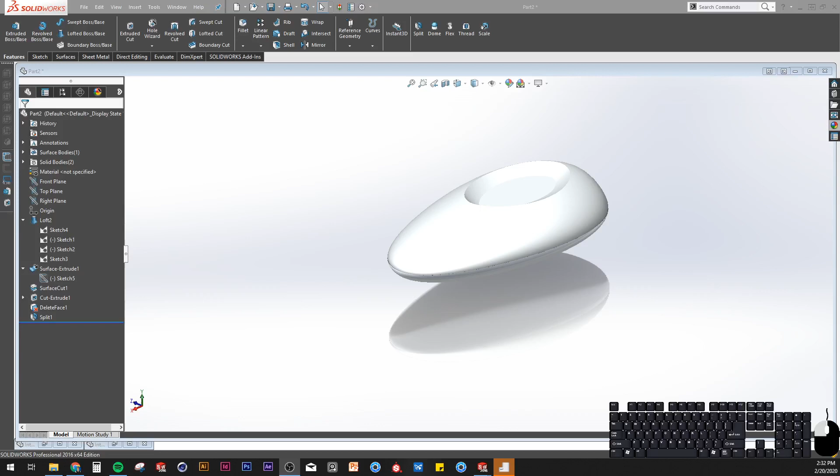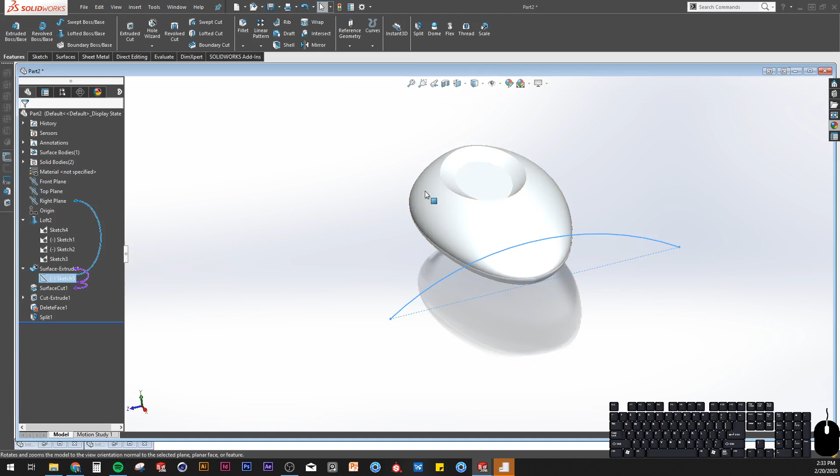Alright guys, welcome to another Solidworks tutorial. Today we'll be going over lofting really organic shapes, similar to soft rounded surfaces. We won't need to use any surfacing except for maybe some little extra details like I have here. Let's go ahead and get started.

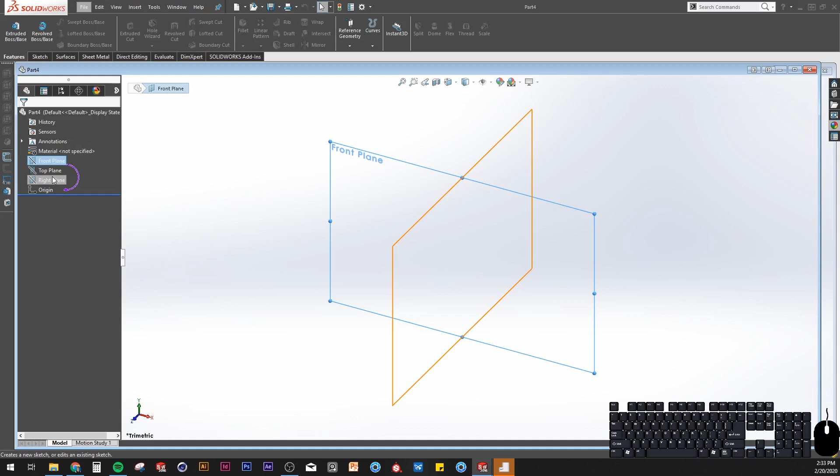The first thing we need to do is set up our sketches, just like any other model. Let's go with our right plane first.

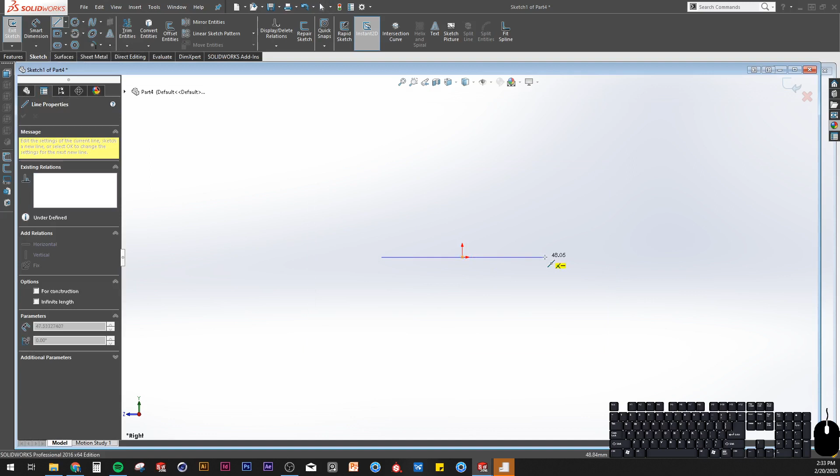What we need to do is create our midpoint line, and I might try something different. I'm going to go to my midpoint line tool by clicking the little arrow next to the line here, clicking on our origin, and let's go out to 50 millimeters. Which is kind of small, we might bump that up a little bit. 100 is perfect.

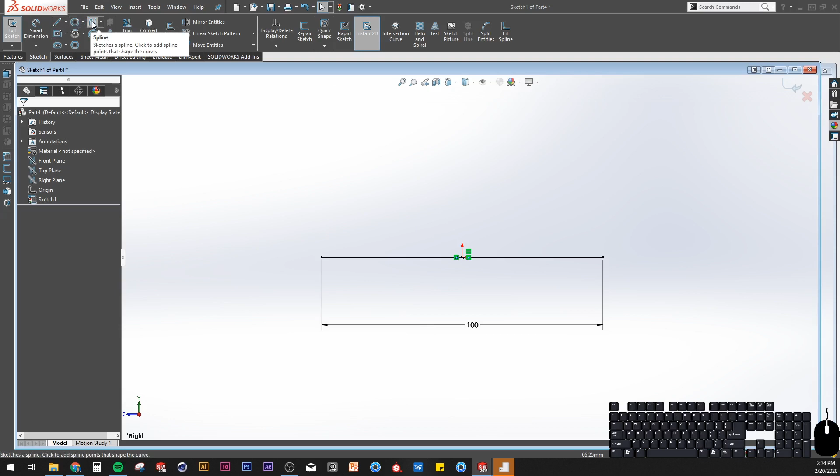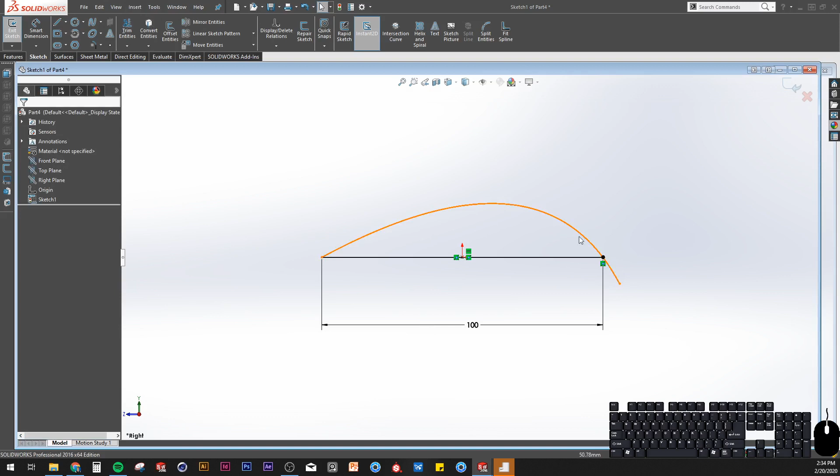Next thing we need to do is create a spline. To do this, we need to go from one point to the other, and then we can do one more point here, but we'll trim that off. Then we need to drag our handles and give them a vertical relation on both sides. But what I might do is create one a little bit higher than the other.

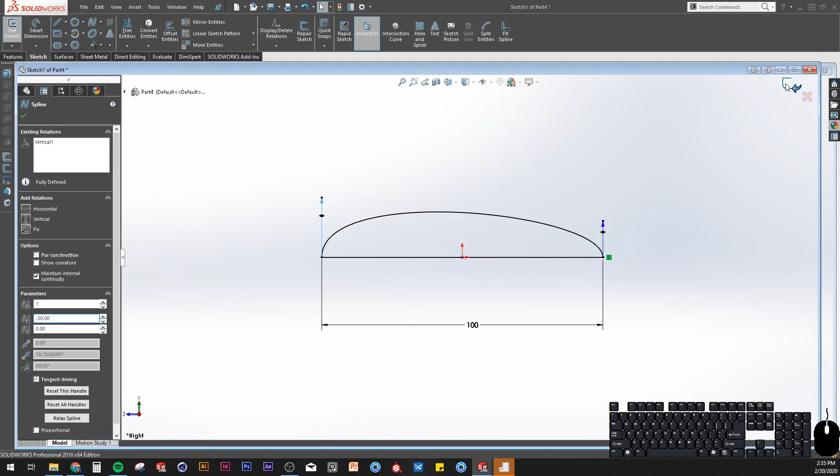Now let's create another sketch on the right plane, but for the bottom. I'm going to start off with my spline this time, going from one end to the other, and then you can click on the line to reveal your handles. Once again, give these a vertical relation, and we'll drag them up. All right, and then we need our midpoint line here.

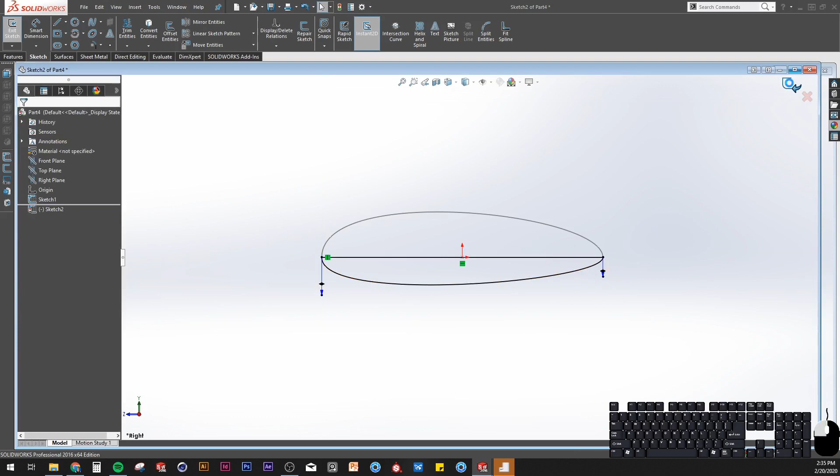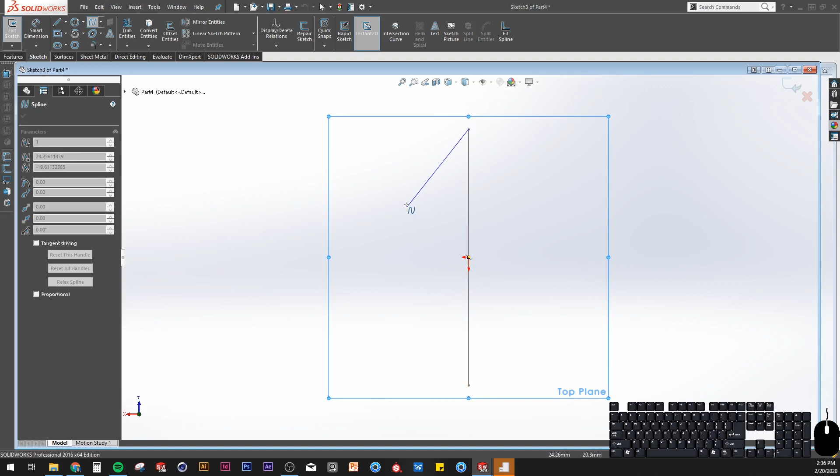Lastly, we need to create a top plane sketch, and we'll be doing this twice. First time let's create, just like before, a spline. But this time we can do a 3-point spline. So let's start with our end, and maybe we'll go somewhere like here and then down. Then we're going to make our top and bottom handle horizontal. And then let's drag this arrow over like this.

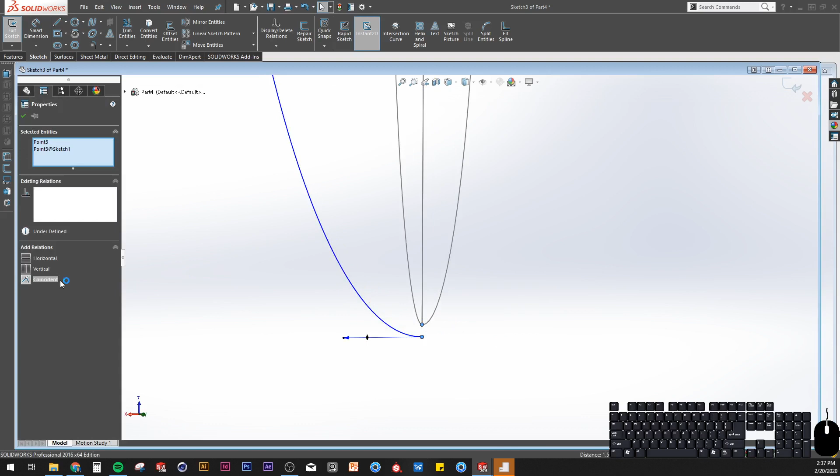Okay, that works. But you can see these endpoints are kind of just floating, so we need to make sure that those snap to where they need to be, or add a relation manually. All right, and then let's use our line tool and hit OK.

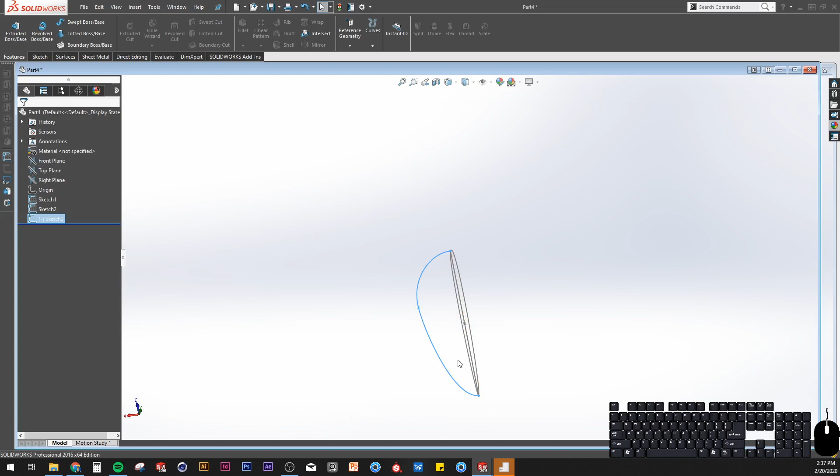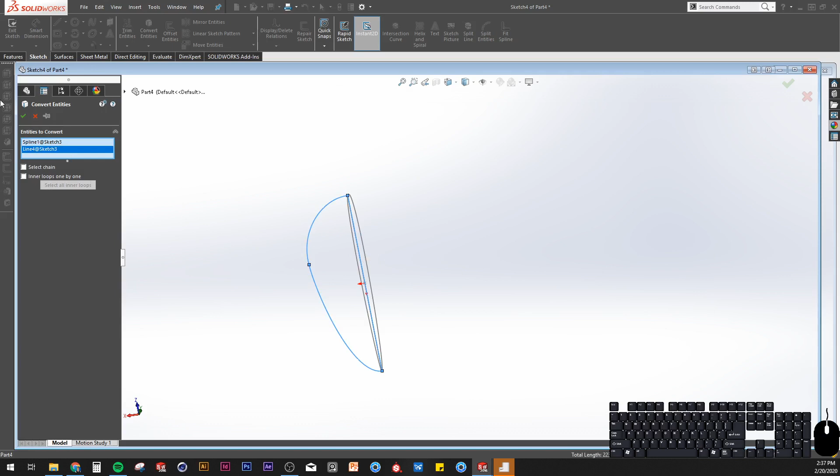Now we need to mirror this, but what I'm going to do for that is create another top plane sketch. Let's copy or convert entity. All right, and then we're going to mirror this entity about the center line, and we're going to copy this. But now we are going to need to make the spline that we copied into a construction line.

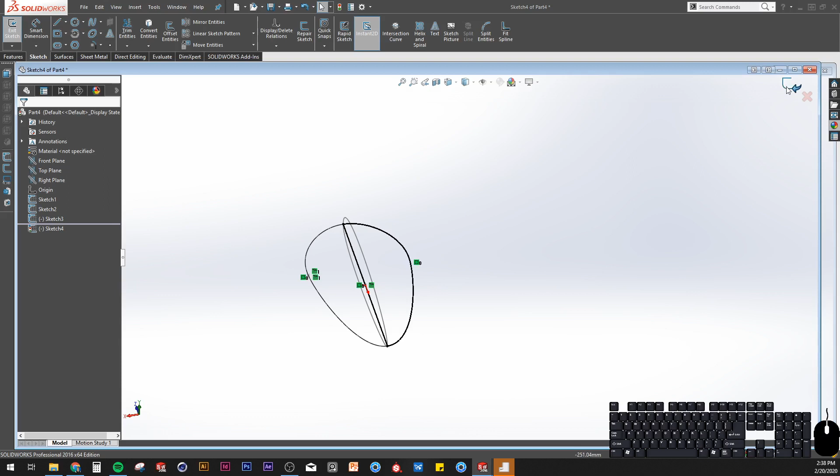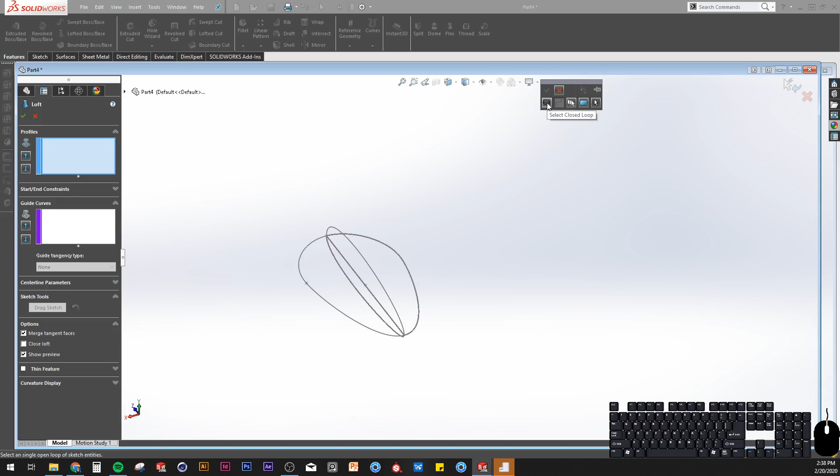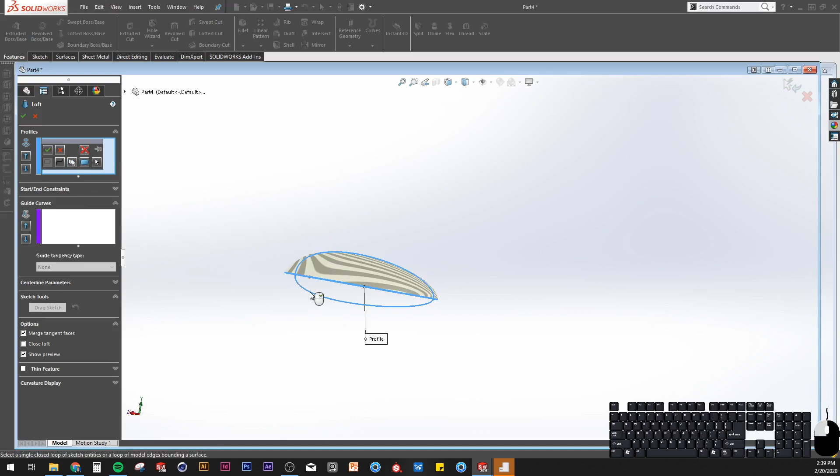So now that we have our form pretty much roughed out, let's go into our Lofted Boss/Base tool. What we want to do is right click into our profiles, go to Selection Manager, and we're going to use our closed loop selection tool. We're going to select all of our sketches, starting either clockwise or counterclockwise, like this. You'll see that it hasn't finished going all the way around, because if I just click on this profile again, it's just going to deselect it. So we need to go and click on our Close Loft option.

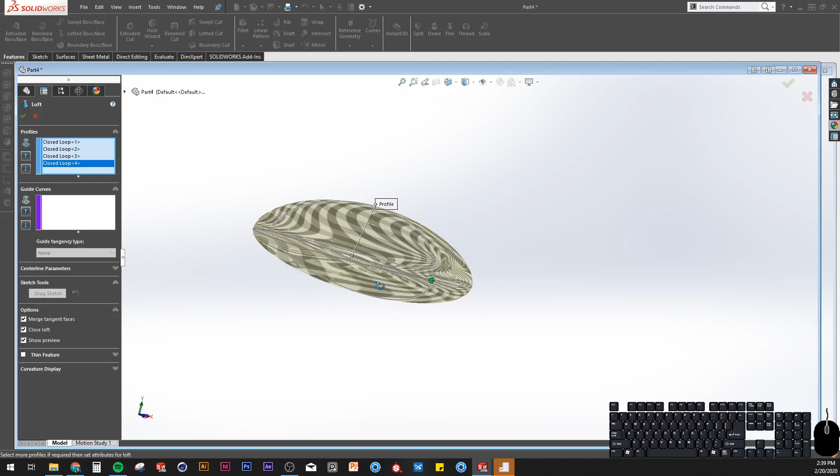Okay, and then hit OK.

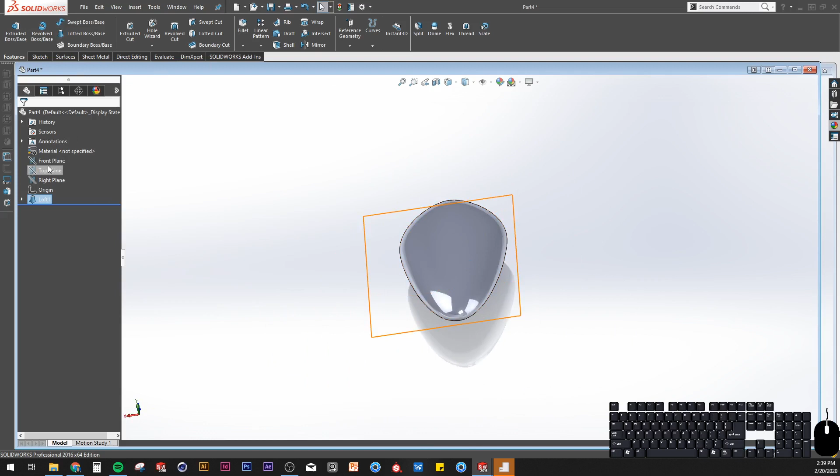So this is a nice way to create a very organic surface shape just by using the Loft tool and sketches. Now let's have a little bit more fun with it and add in a little thumb groove. Maybe this is like a little presenter remote for a PowerPoint presentation, or maybe this is just a worry stone fidget toy.

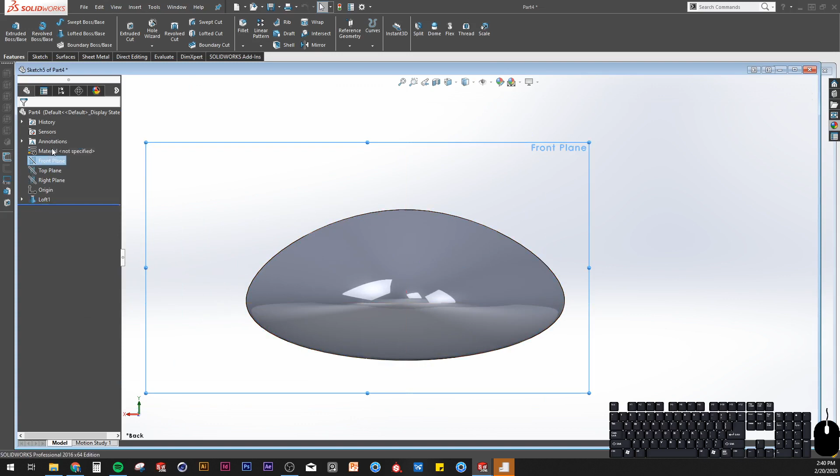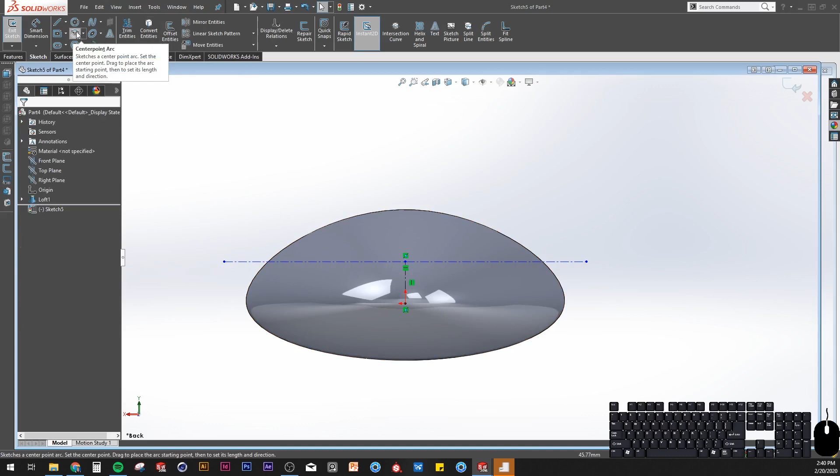Let's create a new sketch on our front plane. I'm going to create a center line coincident to the midpoint of the horizontal line, and then create an arc. Let's do a 3-point arc, something like that.

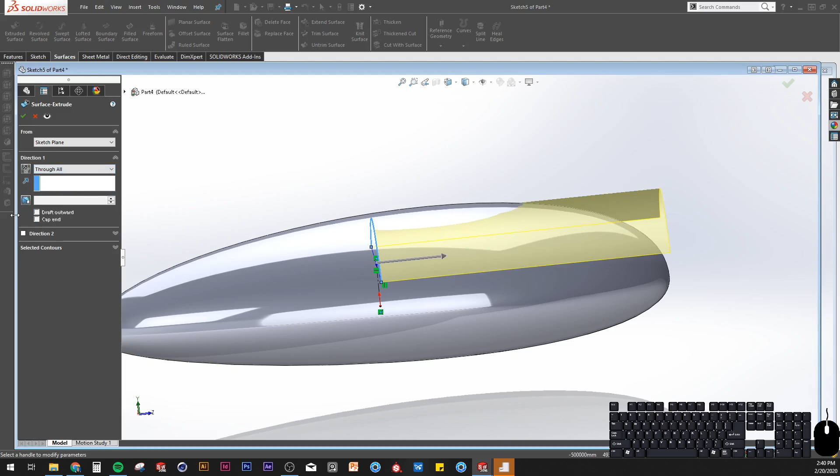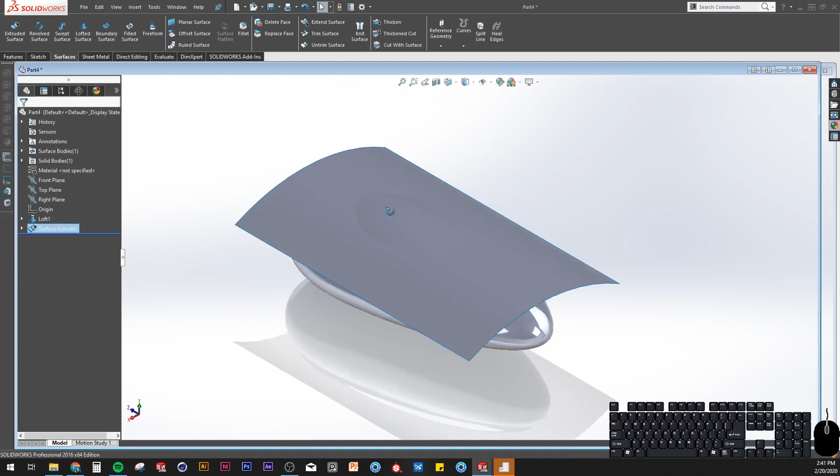And let's do a surface extrude. I'm going to do through all, and through all on the other side. There are multiple ways I could do this. I don't have to use a surface, I could just simply use a cut, but I want to show you this tool, because we can cut with the surface, which really gives you a lot more freedom.

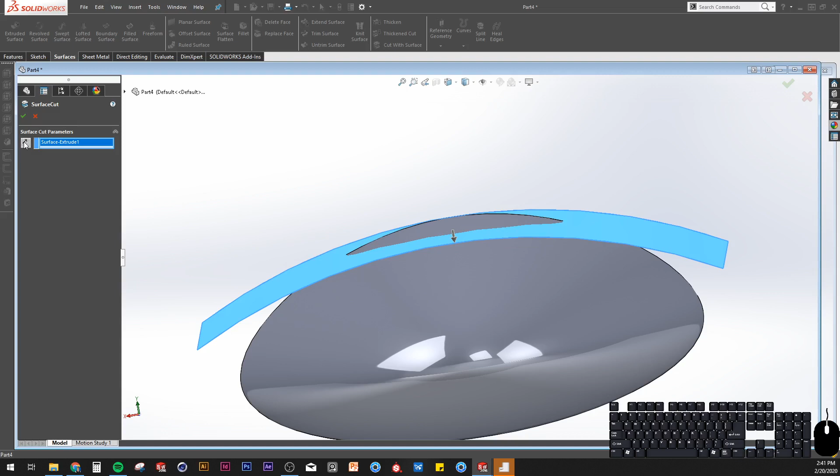Under our surfacing tool, using the surface cut, let's select our new surface that we created, and make sure that this arrow is pointing in the direction of the cut that you want to make. I have to flip mine. And I can go ahead and hide the surface.

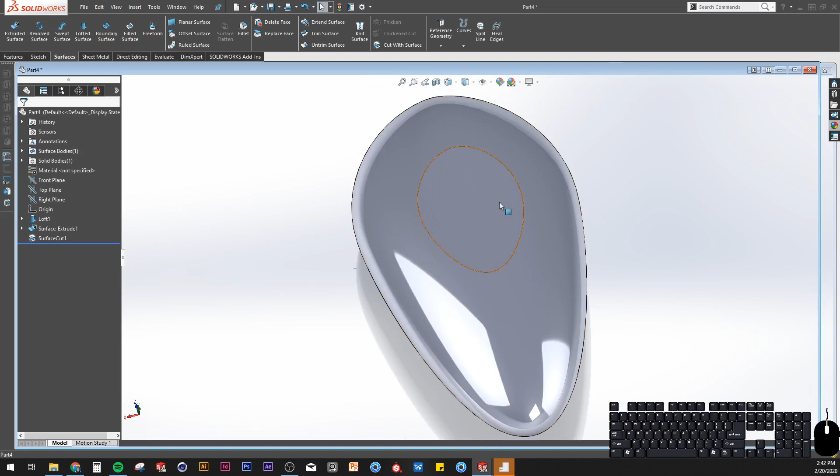So that's kind of nice. But now I want to make this so instead of just having it arced, maybe I want it to dip in a little bit. So let's go and create a sketch on our top plane, and then I'm going to offset. While you have this face selected, choose the Offset Entities tool, and let's go down by about 4 millimeters.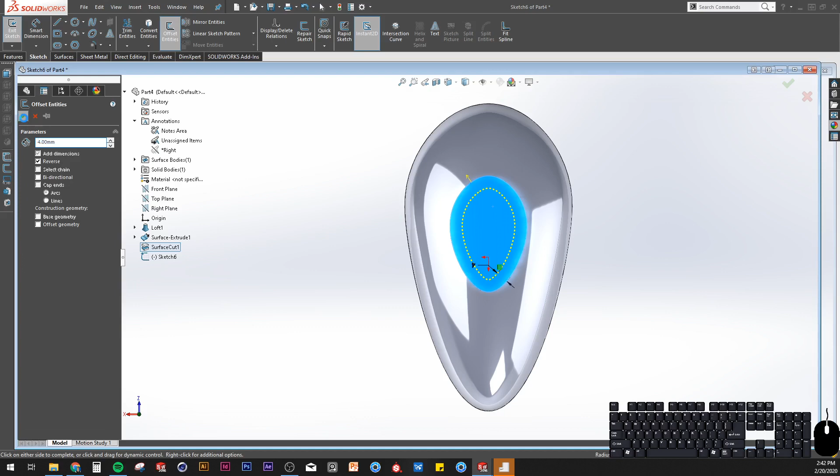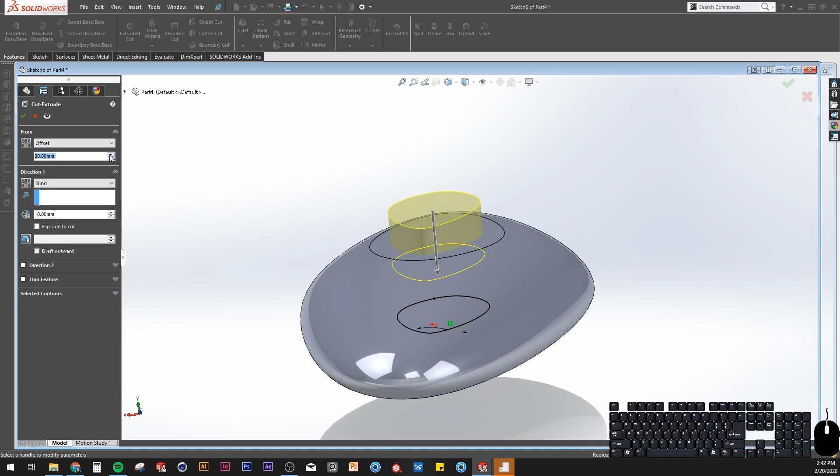What I want to do is extrude cut, but I need to offset this. So from under the from area, let's move that up a little bit. 20 is too much, 30 is too little, so let's go 25 or so, let's go 22 maybe. Something like this.

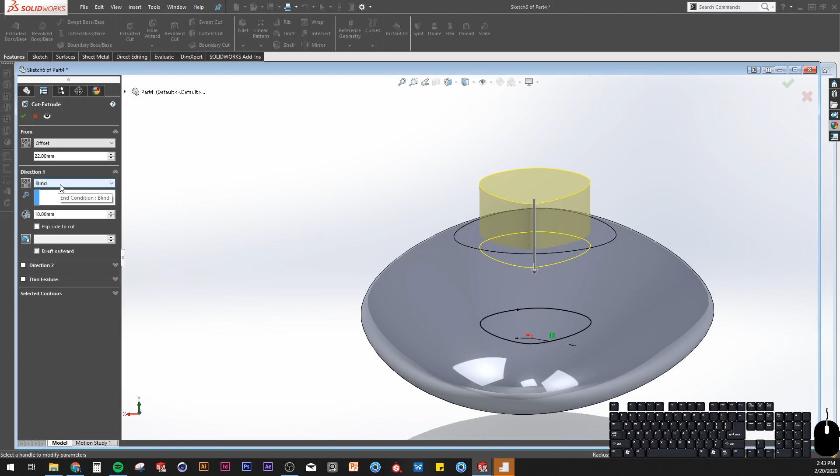Oh, I see what's happening. Let's go back down to 10, 15, no, 12. Okay, there we go, 12. And then under the direction, make sure that it's going upwards, and just choose through all. Hit OK.

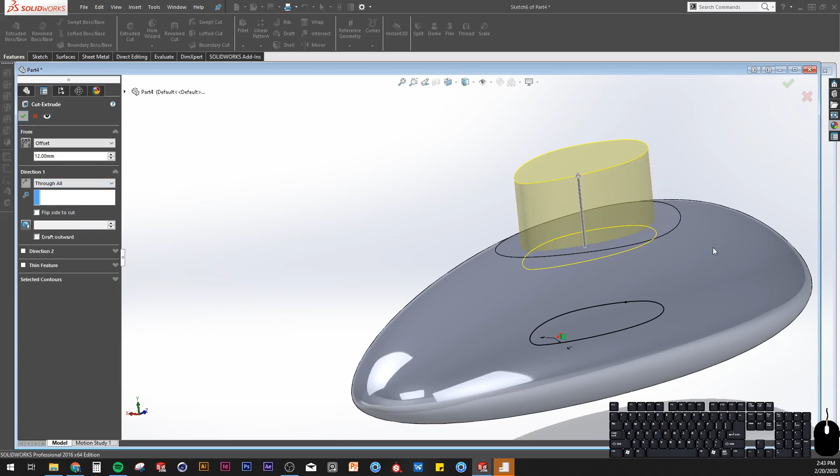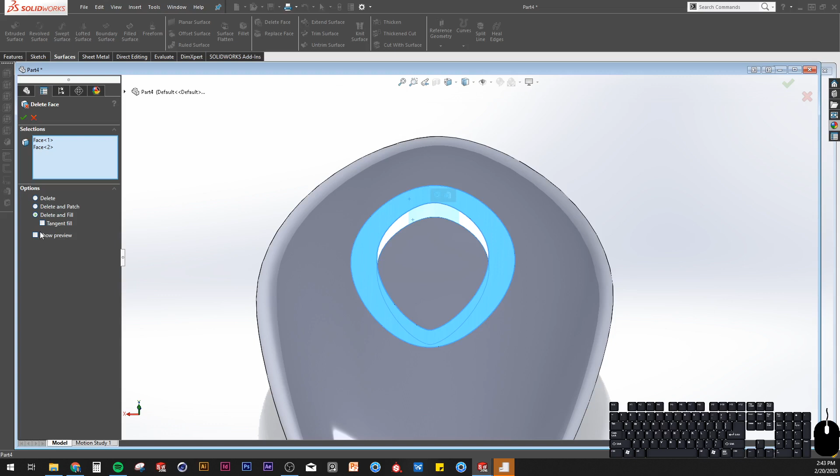Now what we need to do is delete—going back into our surfaces tab, choose delete face, select these two surfaces here, and then we want to use the option delete and fill, but let's uncheck the tangent fill option. You can see a preview, well, maybe not because it's hidden under the surface, but sometimes you can see the preview. And hit OK.

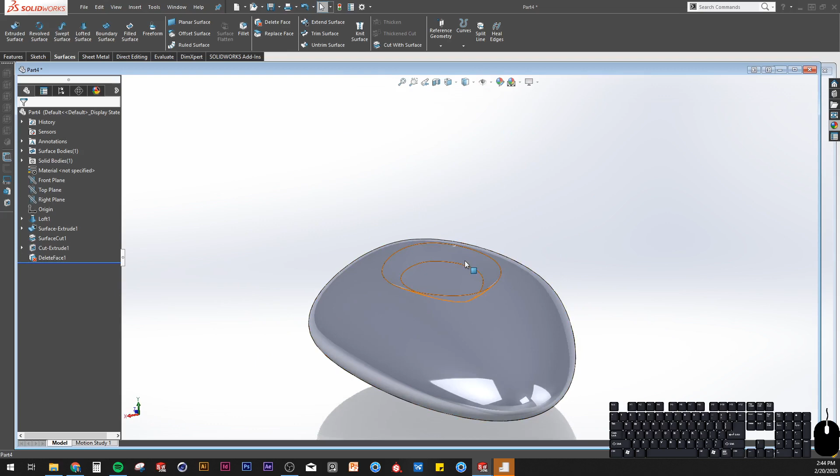And what this gives me is a really nice even chamfer. Because if I just use the chamfer tool, it wouldn't be perfectly symmetrical on the top face because of the fact that it's on a curve.

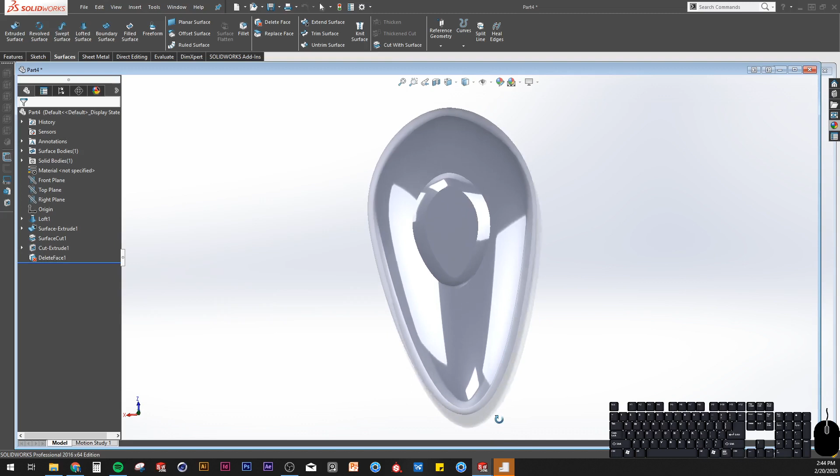All right, so there you have it. Really cool little organic shape, and we could even do that same thing we did here on the front face.

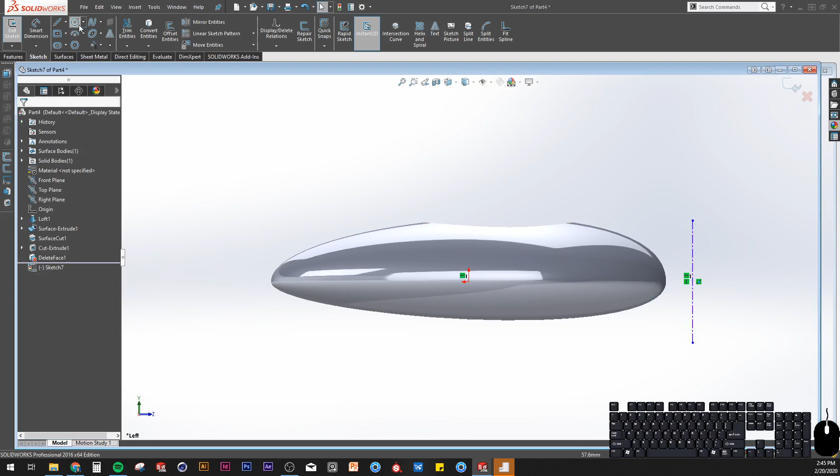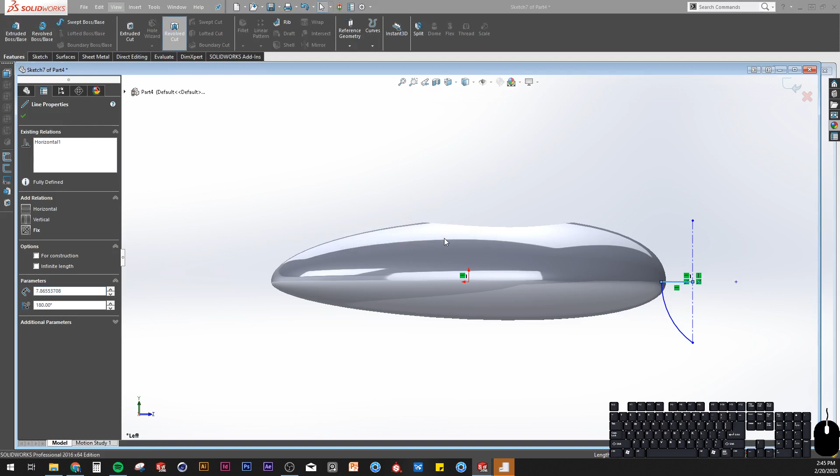Actually, let's just do that real quick. Center point, let's go horizontal, so my midpoint is horizontal to my origin. Use our arc tool. And actually, what I can do here, let's go ahead and trim this off. I'm going to do a Revolve Cut. I didn't have this closed, so it asked me if I would like to close this sketch, and I said yes.

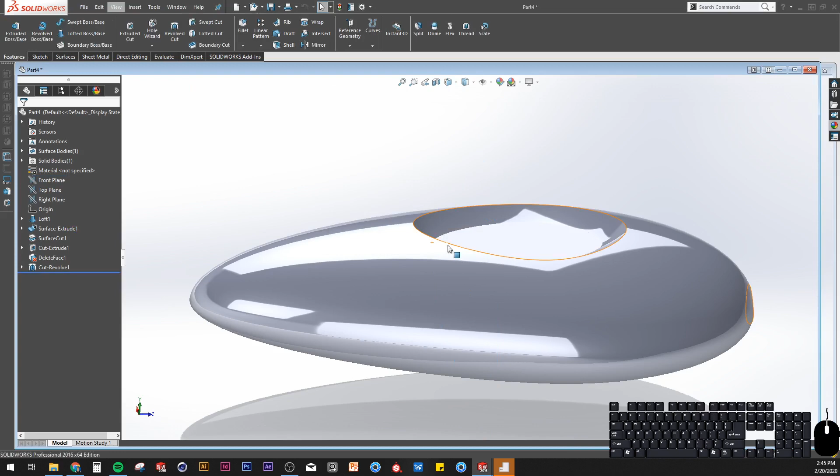And maybe this face would be glass or something, and this body can be, I don't know, like a soft touch.

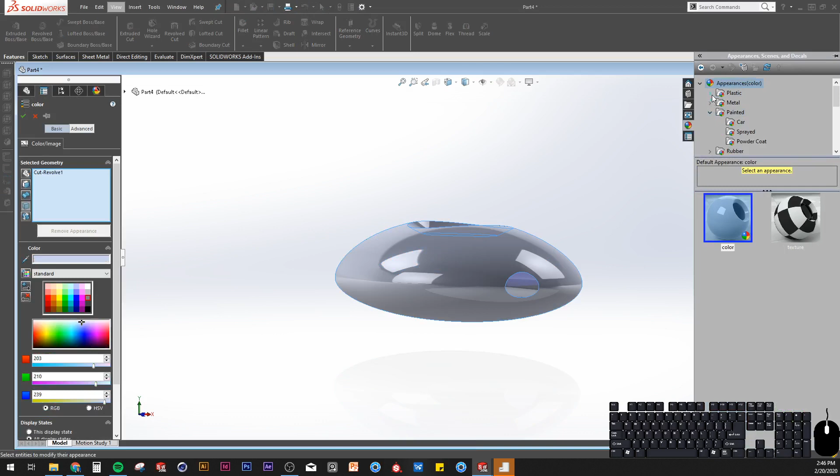Anyway, there you have it. So make sure you save it, obviously. And I'll see you on the next one.